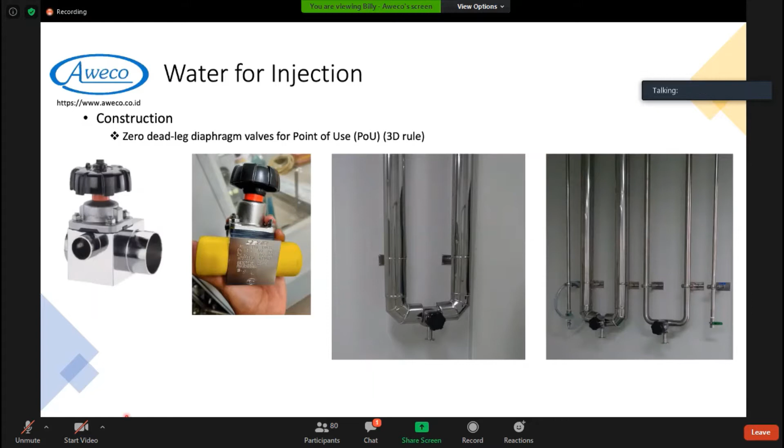Qualification kriteria sesuai dengan USP, WFI harus memiliki conductivity di bawah 1,3 mikrosiemens di 25 derajat Celcius dan total organic carbon di bawah 500 ppb, dan hal ini akan dibahas lebih lanjut oleh Mr. Rohit, Principal SWES, karena ada beberapa perubahan di USP 643 yang berlaku efektif 1 Mei 2021, dan ada kriteria bakteria dan ada kriteria endotoksin.

Dua kriteria conductivity dan total organic carbon ini dapat diinkorporasikan secara online di loop system dan dapat dimonitor langsung melalui HMI di PLC. Sedangkan faktor bakteria dan endotoksin biasanya dilakukan pengecekan secara offline di lab masing-masing perusahaan.

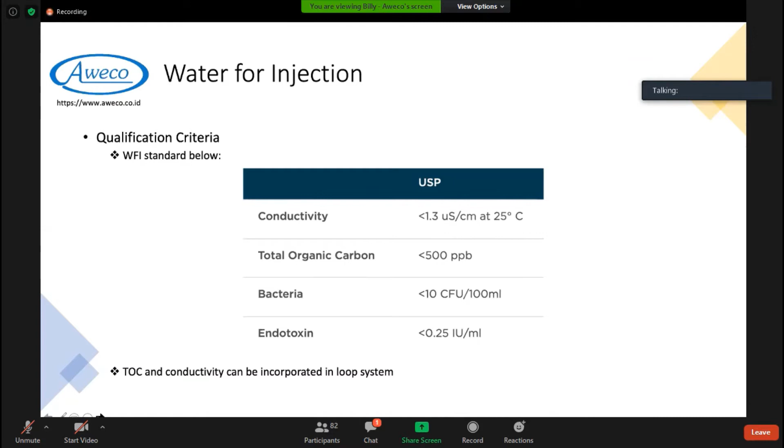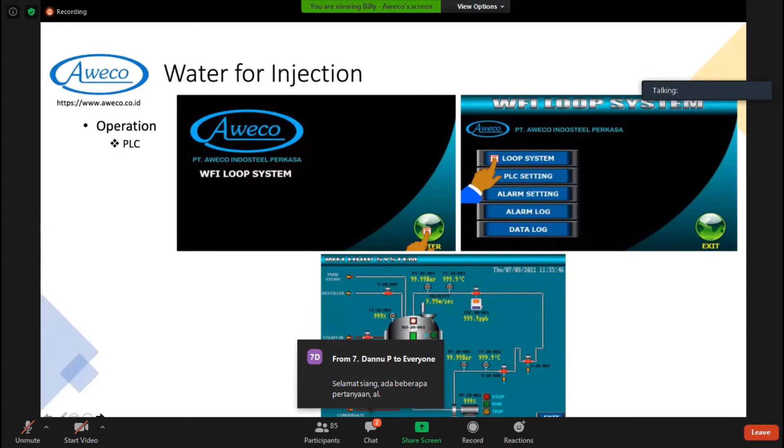Dapat dilihat ini adalah typical P&ID WFI loop dengan all hot POU. Jadi POU-nya menghasilkan WFI yang hot.

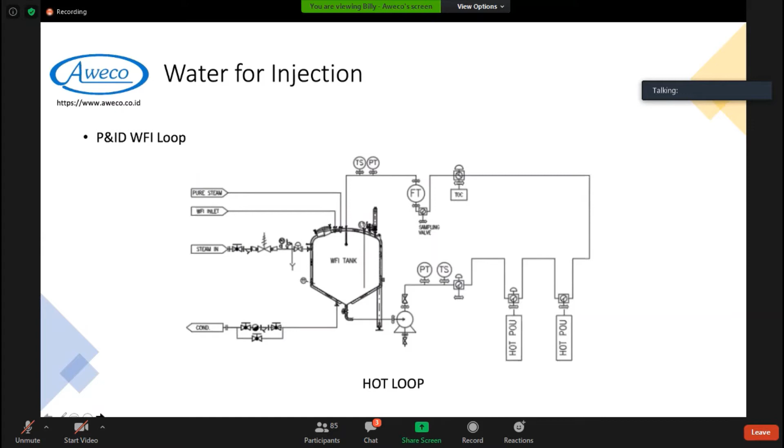Untuk beberapa customer yang kami pernah jumpai, mereka ada request, mereka membutuhkan WFI cold untuk bahan baku obat mereka. Untuk customer-customer tersebut, kami pasang heat exchanger sebagai berikut untuk dapat menghasilkan WFI yang cold.

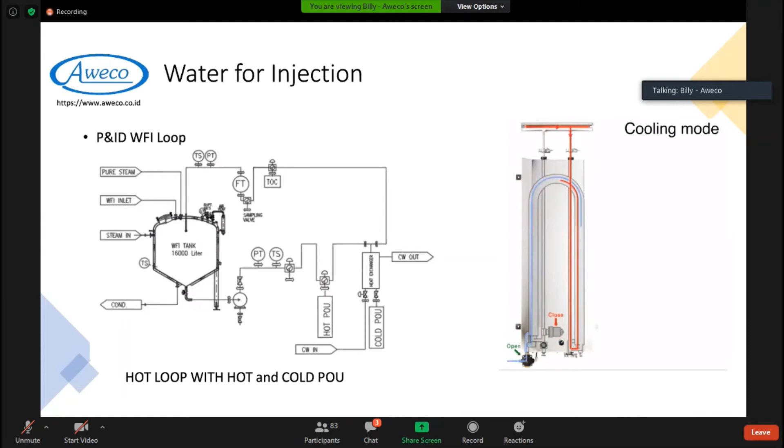Dapat dilihat di video ini, apabila user point tidak terbuka, WFI loop hanya tetap bersirkulasi di heat exchanger tersebut. Dan apabila cold POU dibuka, cooling water akan mulai mendinginkan WFI loop tersebut sampai suhu tercapai dan cold POU terbuka.

Di foto ini dapat dilihat aktual heat exchanger yang terpasang di salah satu proyek kami, dan ini adalah cold POU yang akan terbuka apabila suhu sudah tercapai.

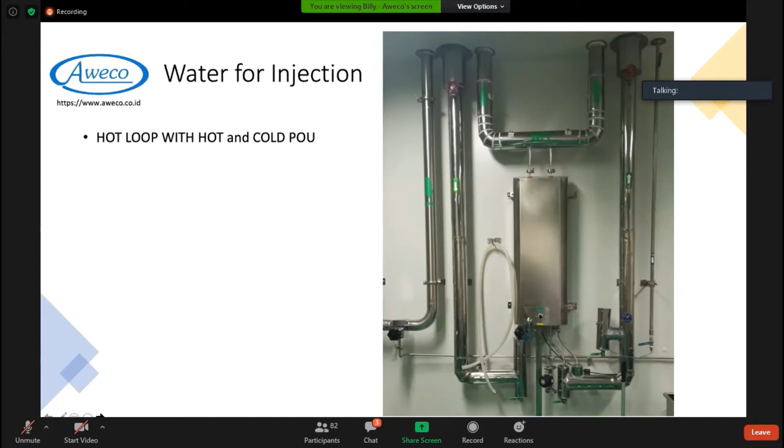Heat exchanger tersebut bukan satu-satunya jalan untuk mendapatkan cold POU, karena kami juga mendesain sistem di mana kami juga dapat menghasilkan cold WFI. Kami bisa di sini mensuplai HE untuk cooling, sehingga WFI yang keluar dari cold POU adalah cold, kemudian ada HE heater di mana WFI akan dipanaskan kembali sebelum masuk kembali ke main loop WFI yang hot.

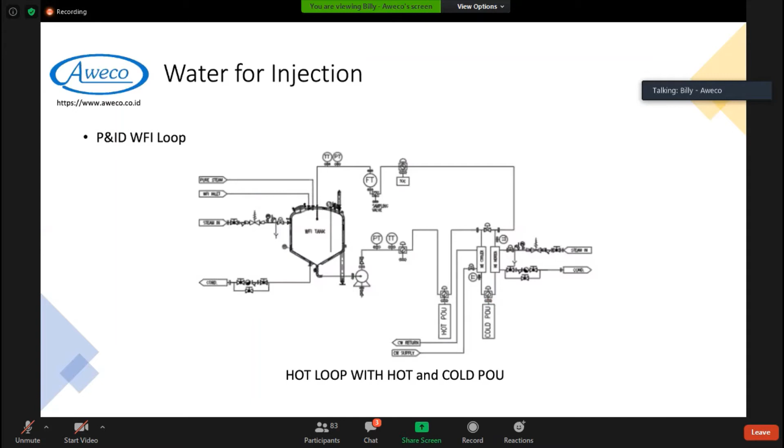Untuk commissioning, kami menyediakan dokumen IQOQ. Dokumen IQ terdiri dari material test reports dari piping dan fitting yang terinstall, kalibrasi dari instrumen yang terpasang, slope dari piping, poroscope report dari welding, hydro test, dan passivation report dari piping.

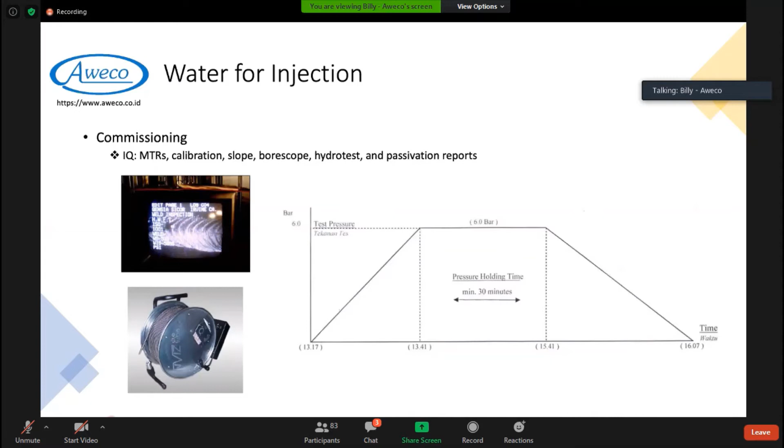Untuk passivation, kami menggunakan standar Koslow, pengecekan dengan metode Koslow, di mana kriterianya dapat dilihat di bawah ini. Apabila sudah mencapai pasif, kami anggap pasivasi sudah berhasil dan free iron sudah ter-remove dari loop system dan sudah terbentuk oxide layer yang membuat loop system lebih anti-korosif.

Passivation kami mulai dengan proses degreasing dengan menggunakan caustic soda. Untuk passivation kami menggunakan nitric acid, dan untuk langkah terakhir cleaning kami menggunakan hydrogen peroxide.

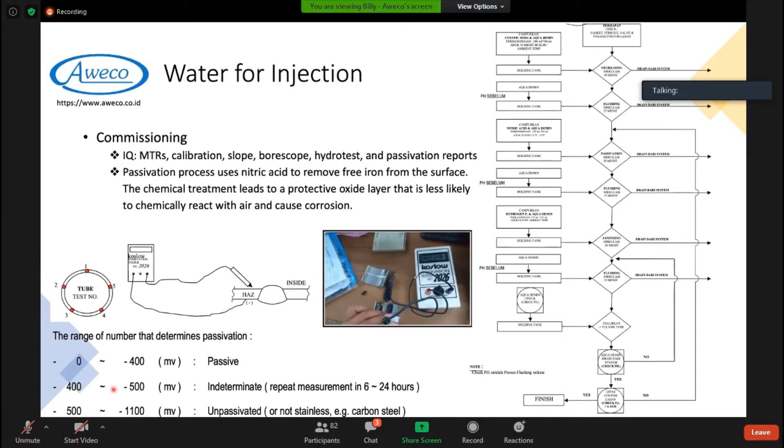Untuk OQ kami melakukan velocity test. Kami tes apakah pompa dapat mensuplai flow rate yang stabil di loop system dengan membuka 1 atau 2 POU. Untuk heating test juga kami mengetes apakah utilitasnya cukup untuk menjaga kestabilan suhu WFI di dalam tangki dan di dalam looping system juga. Dan untuk operational trial kami mengetes apakah PLC dapat berjalan sesuai sebagaimana yang dikehendaki.

Setelah semua ini dilakukan, kami handover kepada customer untuk memulai PQ mereka. Sekian presentasi dari kami, terima kasih saya ucapkan atas perhatiannya. Apabila ada pertanyaan dapat disampaikan melalui chat box dan kami akan mereply secepat mungkin.

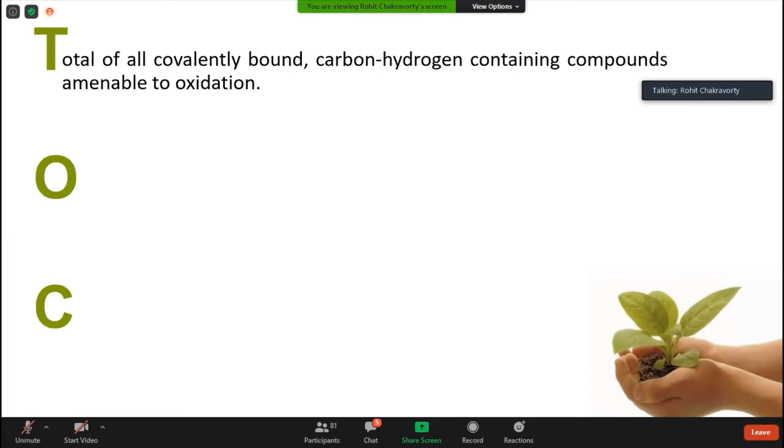So starting with, in general, what is organic carbon before we do a deep dive in USP 643. Organic carbon is nothing but when carbon and hydrogen are covalently linked to each other, and upon oxidation they form carbon dioxide. Such kind of carbon containing molecules are called organic carbon. Examples are glucose, sucrose, potassium hydrogen phthalate, where carbon and hydrogen are covalently linked to each other. The origin of organic carbon is available in nature, and it's available naturally in vegetation, algae, sediments, and also as particles in water.

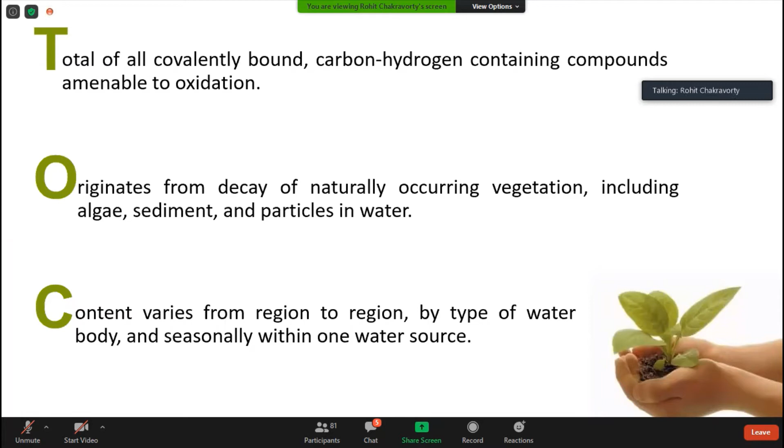And the content of the organic carbon varies from region to region and season to season. So, for example, river water in summer season in hot conditions might have a different TOC, whereas in winter or autumn or spring, the TOC can be different. So it all depends on how the climatic conditions are, and the content keeps on changing depending on the surrounding conditions.

So what's the importance of TOC monitoring in the industry? First of all, water, which is a very critical raw material and the major raw material required to manufacture medicines, that's the reason it's very important to check the quality of water. And the key parameters to check the quality of water are TOC, conductivity, endotoxin, and bioburden, especially for the water for injection. So as water is the major raw material, TOC can be an indicative marker of the purity of the water.

As Mr. Billy has presented already, the skid systems that they have help in generating the water for injection, and also they have solutions for the purification and the generation of the water.

In that case, whether the system is working fine or not, how can you judge whether the water is being purified? TOC, conductivity, endotoxin and bioburden are kinds of markers that show the water system and generation system are working fine and in place, or they can give you notification of any early contamination or biofilm formation. Those kinds of information can be received by doing TOC and conducting other tests.

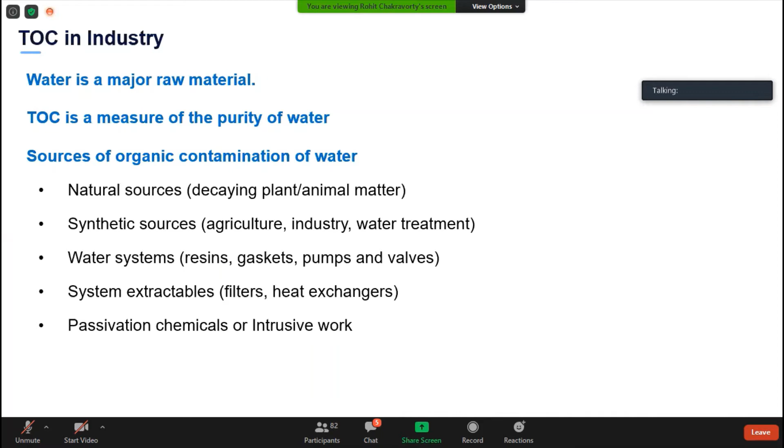So why test purified water? Because it gives information on whether your source water is contaminated. It also helps us understand whether the purification system is working fine or not, or if there is any failure, maybe a valve not closing properly, or a leakage in a pipe. In all such cases, the TOC and other parameters go up, so it's a good indicator.

TOC also helps us understand whether there is any contamination in the generation and purification system, whether there is any biofilm formation, and whether we should now do sanitation of the entire water system.

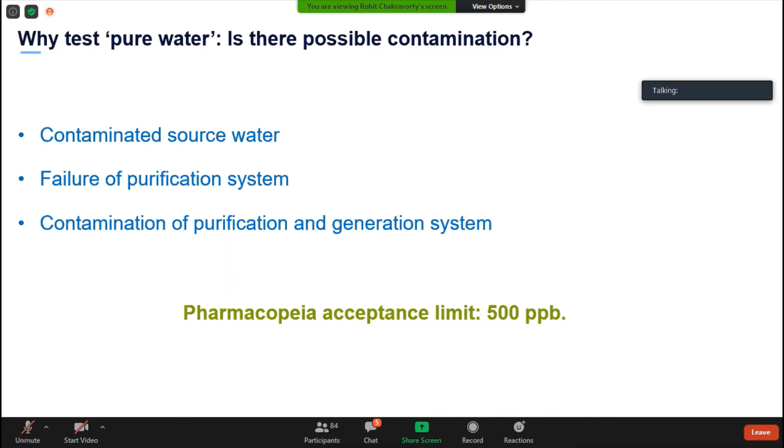The pharmacopoeia acceptance limit, be it USP, EP, China pharmacopoeia, Indian pharmacopoeia, Korean pharmacopoeia, or Japanese pharmacopoeia, everyone has a limit of 500 ppb. This is for bulk water.

So the compendial requirement for any instrument used is that the pharmacopoeia never says this brand is good or that brand is good. What it says is whatever instrument you use should have a limit of detection of less than 0.05 ppm, which is less than 50 ppb.

The instrument should be able to oxidize the organic carbon to form CO2. As we discussed in the definition, when carbon and hydrogen are covalently linked to each other, and upon oxidation they form carbon dioxide, such molecules are called organic. Similarly, the instrument should be capable of oxidizing the organic carbon to CO2.

As per the pharmacopoeia guidelines, there are some challenging tests called system suitability tests. These give us an idea of whether the instrument is reporting fine, and then you can start an analysis. Whatever technology is used to monitor TOC should discriminate between TC and IC. TC is total carbon, IC is inorganic carbon, and the TOC we obtain should be a subtraction of total carbon minus inorganic carbon.

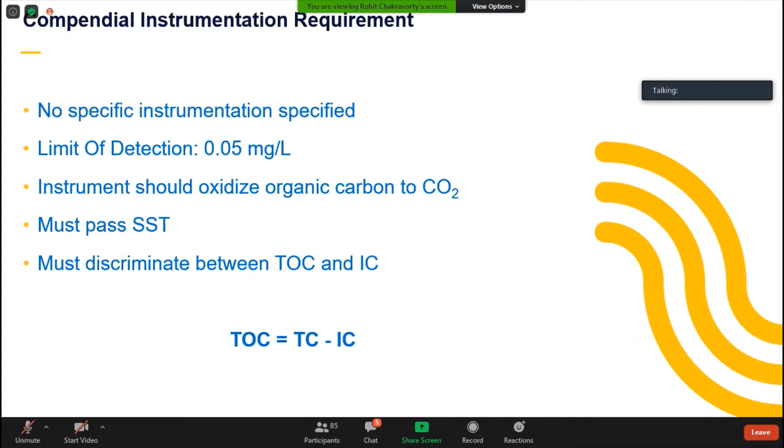USP, EP, China and Indian pharmacopoeia have the same system suitability compounds. What they have done is keep the standard open for calibration, stating it should be as per manufacturer's recommendation.

Whereas if you see Japanese and Korean pharmacopoeia, it's a bit more scientific compared to the others, as they have mandated it for raw water, purified water, and water for injection. Even USP 643, as per the 1998 monograph, mandates it for purified water, WFI, and sterile packaged water TOC monitoring. The difference between Japanese and Korean versus the other pharmacopoeias is that the system suitability compounds are separate and calibration is by use of KHP. That's the only difference; the rest is more or less the same.

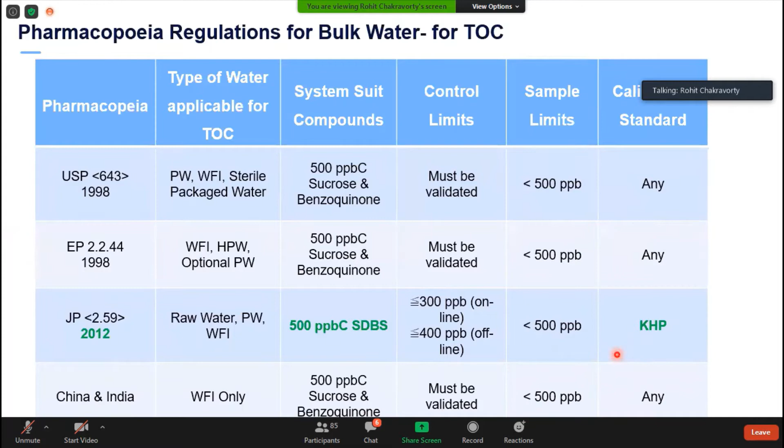I have summarized chapter 643 in one table, and this is the older version of it. There has been a new revision effective from May 2021, so it's already in effect.

What the older version of USP 643 said is that the bulk water TOC limit is 500 ppb, meaning the water coming out after purification and from the generation system should be less than 500 ppb of TOC, and this is only for bulk water. For sterile packaged water, the limit was that TOC should be less than 8 ppm after blank correction, so whatever blank is used to monitor the TOC, after blank correction the value should be 8 ppm.

Sample water should meet the requirement, and it should not be more than the limit response. Limit response means the 500 ppb limit and the 8 ppm limit for the sterile packaged water.

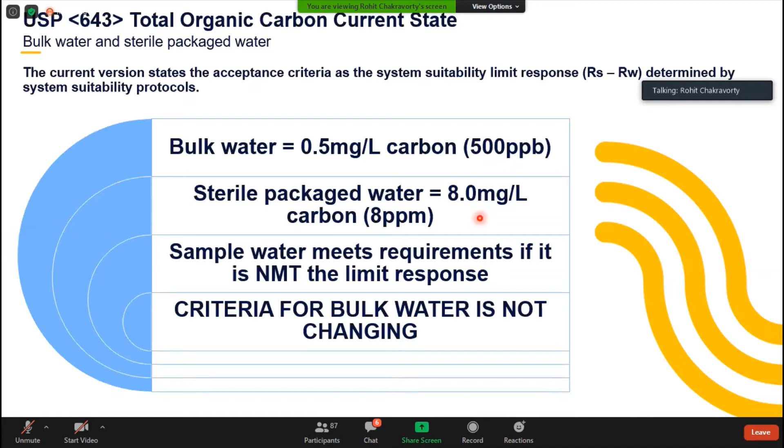In the new edition that we had this year, which is in effect from May 2021, everything is the same for bulk water. So the bulk water testing remains the same. The limit remains the same, which is 500 ppb.

The sterile water criteria have changed, especially how to perform the SST and what should be the acceptance criteria. The change is because of the different container sizes they have put in. Earlier, the sterile packaged water had just one 8 ppm limit, irrespective of container size.

But now, if you see the sterile packaged water section in chapter 643, there are three different container size segregations, and based on the size of the container, the limit of TOC is different, and the limit for system suitability is also different.

So moving on with what's changed and what's not. As I said, the bulk water chapter remains the same. The system suitability criteria, where the combined recovery should be between 85% to 115% of sucrose and benzoquinone, still remains the same.

So the only thing that has changed is the limits and at what range, for what kind of container size, the system suitability is to be performed.

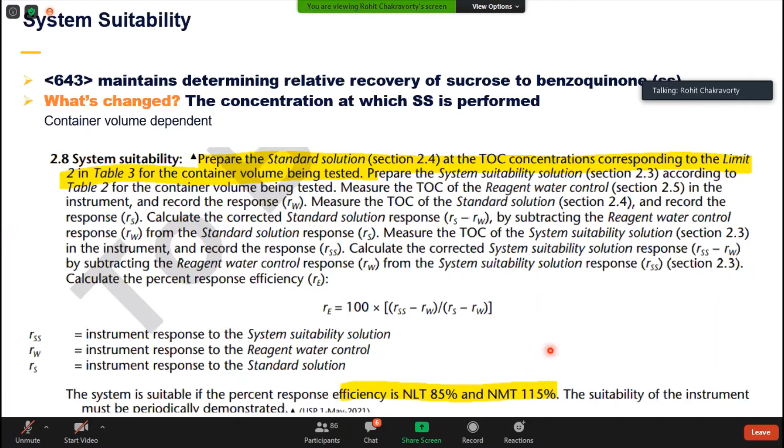Here I have pasted the section from the revised chapter. As you can see, the limit of passing is between 85% to 115% of recovery. If it's less than 85% or more than 115%, the SST fails, as it was earlier. So this criteria remains the same, but the only change is to the size of container.

USP has segregated the container size into three parts: less than 5 ml packaged container for sterile water, containers more than 5 ml and less than 100 ml, and containers with more than 100 ml capacity for the packaged water. These are the three main classes.

If you see, the system suitability requirement for a less than 5 ml container is 48 ppm, so it's way too high. Earlier it was 8 ppm, but now based on their study, what they've seen is that the smaller the container size, the same is the material, right?

So the volume of water is also very little, which is less than 5 ml. In that case, whatever organic carbon is leaching out from the packaging material, the concentration will be very high. As the size of the container increases, the water inside also increases, so if there is any leaching from the container, it gets diluted because there's more water.

That's the reason the increase in container size leads to a decrease in the passing limit. So if the container volume is more than 100 ml, the carbon concentration for the SST is 12 ppm. If it's between 5 to 100 ml, the passing criteria for benzoquinone is 36 ppm. And if it's less than 5 ml, the passing criteria is 48 ppm.

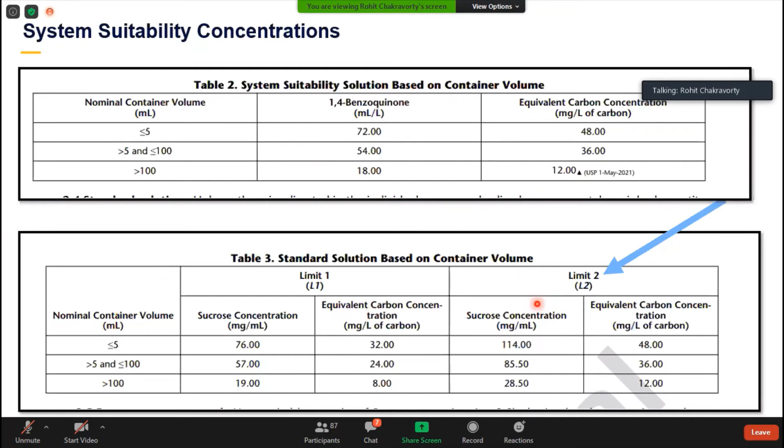So how can we support you to comply with the system suitability and the other parameters that you have because of this new edited version of the USP 643?

So we have an app note where we have described the flow rates. As you know, for bulk water we have a different section of TOCs, which is checkpoint, and which is M500. The limit for those TOCs is only up to 2.5 ppm. That's good for bulk water. But when you talk about sterile water or packaged water, in that case the TOC requirement is up to 48 ppm.

So in that case we have a separate instrument for pharma, which is called M9. It can be used in lab. It is also available in a portable format, and we also have an online version of it.

So we have an app note on how much acid, how much oxidizer, or how the method development should be done when you are validating your study or doing a system suitability. Because of the high ppm, you may not know how much acid and how much oxidizer has to be used.

So we have something called auto reagent mode. In case you would not like to use the auto reagent mode, we have the recommended flow rates in the app note that we have come out with.

We also have the standard sets for each bracket, because now if you see, the system suitability process has become very tedious, and for different container sizes you have to comply with different limits of system suitability.

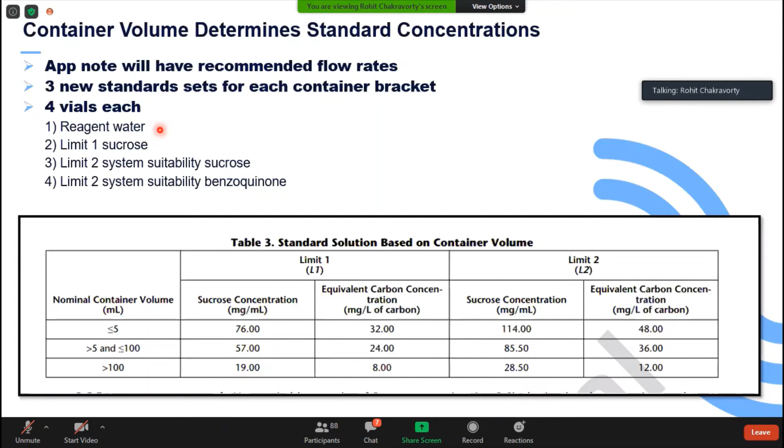The second vial is for limit 1 of sucrose. The third one is for limit 2 of system suitability of sucrose. And the fourth one is limit 2 of system suitability of benzoquinone. So these two are the system suitability standards - this is just a verification standard, and this is the reagent water that we have.

Because here the organic carbon value is very high, which is 48 ppm that we saw. When the container size is between 5 to 100 ml, in that case the oxidizer flow rate drops because the organic carbon content in the sample also drops. So the oxidizer required is high only when the concentration of organic carbon is high. If the concentration of organic carbon is low, the oxidizer required is also low.

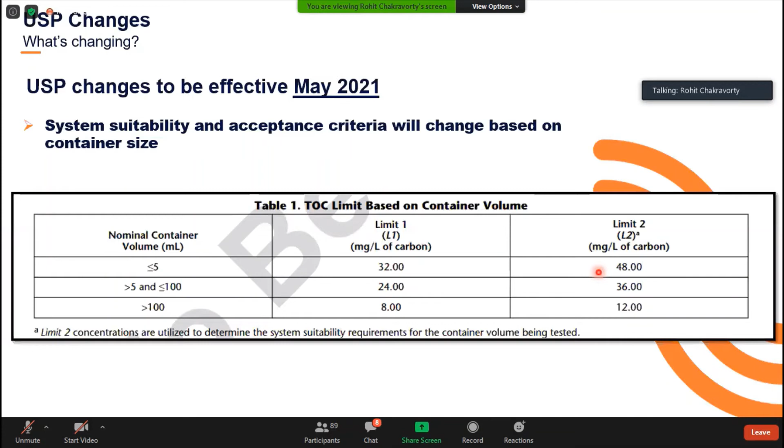Now, as we discussed in the second criteria, if it's more than L1 but less than L2, what USP has said is, fine, if it's less than L2 but more than L1 - for example, if I go back again, if it's 34 ppm - it has failed the first limit, but it is within the second limit. So if it's 34 ppm, the result is passed, but then there has to be further investigation on what specific organic is causing the spike. So that is an extra step that the pharma manufacturers have to do.

So what they have to do is classify all the species. For example, the container is a plastic bag. The plastic bag that you have is made up of polymers, made up of coloring materials - like some containers you can see red color, some containers you have which is whitish, some containers you have yellowish. So it's all coloring agents, additives, stabilizers, which are added along with the polymer, which is your plastic. In that case, you have to segregate each and every component which makes the entire packaging system.

And then you have to test individually if all the organic species are less than 0.2 ppm. If it's less than 0.2 ppm, which is 200 ppb, then the result is a pass, and it is advised that the packaging material that you have is not hazardous to the patient, but it's safe. If the limit goes beyond 0.2 ppm for a specific kind of plastic material, in that case, it has to be evaluated for the safety.

For example, there are 10 different materials inside a polymer, which is a packaging material. And when you test separately all the different components which make up that plastic, if any one of them is beyond 200 ppb or 0.2 ppm, then that specific material has to be tested for the safety. So then comes the allowable daily intake value and other stuff. That is the extra exercise that you have to do if your limit one fails, but limit two is passing - you have to characterize the individual materials which are present inside the packaging material. So this is what it has said in the same USP chapter.

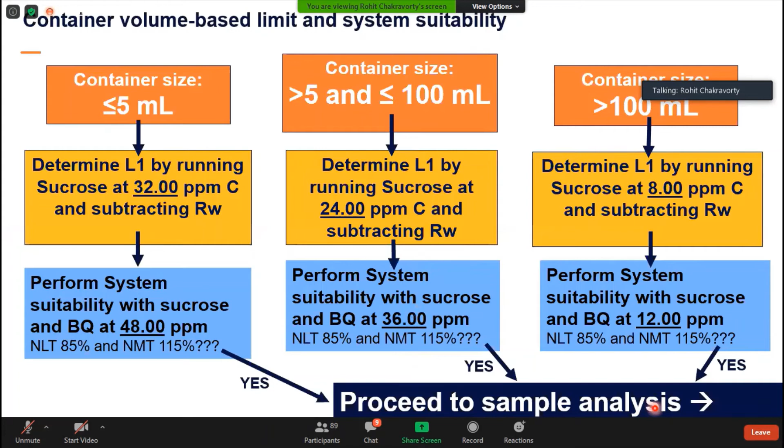For container size between 5 to 100 ml, determine the L1 by running sucrose at 24 ppm carbon and then subtract the reagent water blank. Then perform system suitability with sucrose and benzoquinone at 36 ppm, and the combined recovery again should be between 85 to 115%. If it fails any of this step, you have to rerun the system suitability and you can't start analyzing your sample. If the system suitability is passed, only then proceed to sample analysis. The same goes for container size more than 100 ml.

Now this is the sample analysis. The previous slide was on system suitability. Once you are done with system suitability, then you proceed to sample analysis. Now if the container size that you have is less than or equal to 5 ml, or if it's between 5 to 100 ml, or if it's more than 100 ml, there are separate limits as we discussed for all three types of containers.

If for all the categories the sample limit is less than L1, in that case the sample is passed and the test is complete. That's all on the left-hand side that you see. If it fails the L1, then determine the L2.

And for the L2, if the sample is more than L1 but less than L2, then identify the organic impurities as per step number 2.9.6 in the USP 643. Each impurity should not exceed 200 ppb or 0.2 ppm of carbon. If it exceeds, it has to be evaluated for safety.

On the other hand, if the sample also fails the level 2 limit, which is, for example, 48 ppm for 5 ml and 12 ppm for 100 ml, in that case if it fails even that limit or crosses the L2, the sample is a complete fail and the test is complete. So it means the sample doesn't qualify for further process and has to be discarded, or the root cause has to be identified.

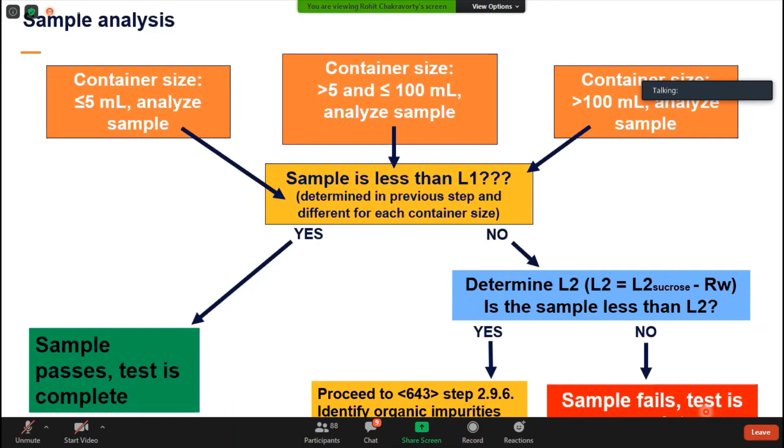So this is the application note that we have. We came up with this in February 2021. It's freely available on our website. In case you would like to access it, you can contact Vision Technique and they can help you with the application.

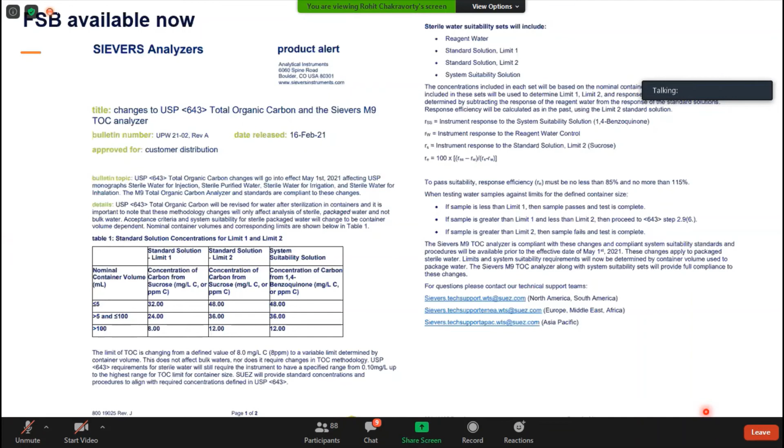So just to summarize what we discussed, the bulk water requirements like the 500 ppb limit remain the same if it's for bulk water. The change has only applied for the sterile packaged water. So only for sterile testing, if anyone is doing sterile packaged water testing, in that case only this change is going to affect you. If you are just using the routine WFI bulk water for your manufacturing process, it doesn't matter. It's just the 500 ppb limit that you have.

The system suitability concentration for sterile packaged water at the sample limits will be container volume dependent. The standards are available with us in case you would like ready-made USP and NIST traceable standards. It comes with a certificate, and the field service bulletin, which is the app I was talking about, is now available on our website.